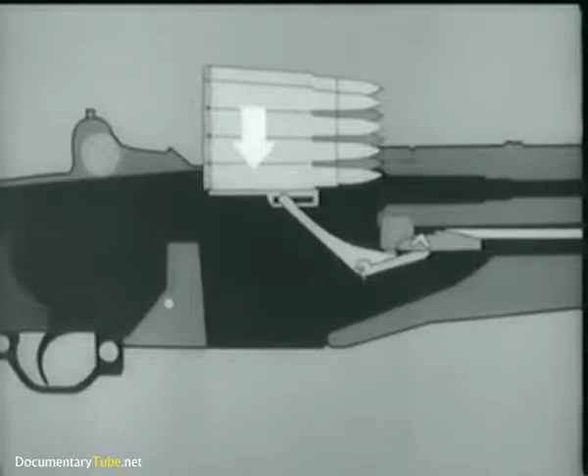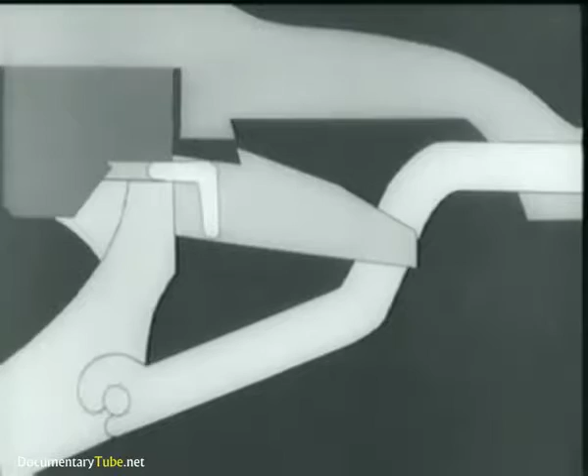This shows what happens when the clip is inserted. The bottom cartridge forces the follower down. The follower arm moves, and its heel rotates the accelerator, camming the operating rod catch down.

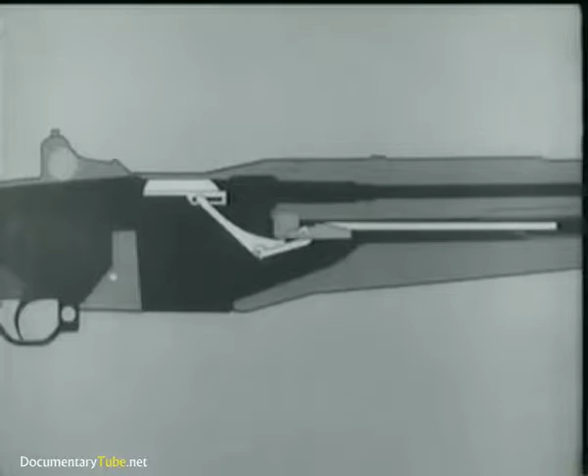We'll now add the operating rod, spring, and bolt to the diagram. Notice that the bolt is held to the rear by the operating rod, and the rod is held by its catch.

Now watch the accelerator as the follower moves down. It rotates, camming the operating rod catch down. When the catch disengages, the rod starts forward, pushed by its compressed spring, and carries the bolt with it.

Take a closer look at the bolt. As it moves forward, a cartridge is stripped from the clip and guided into the chamber by the feed ramp.

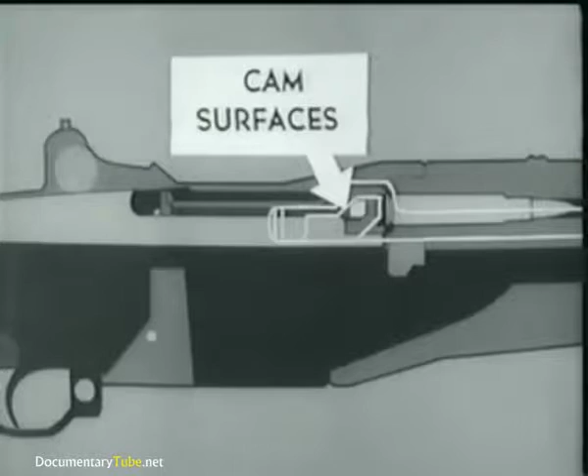When the cartridge is nearly seated, the bolt begins to lock. Watch how the cam surfaces in the operating rod handle act on the operating lug and rotate the bolt into the locked position once more.

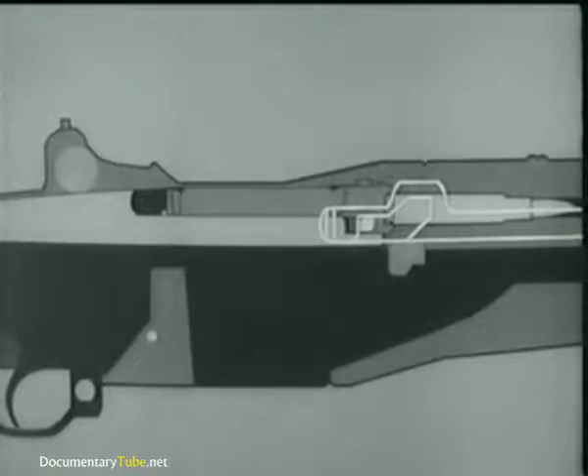Here's the same action on the rifle itself.

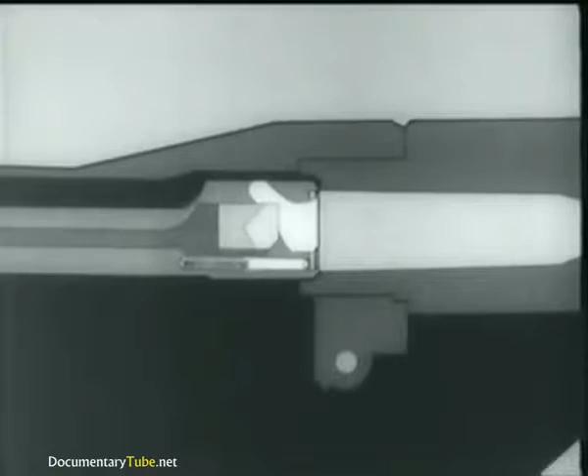Now, as the bolt locks, the extractor snaps into the extractor groove, and the ejector is forced into the face of the bolt, compressing the ejector spring. Remember that this happens as the bolt is locking.

Let's stop here a minute, remove the barrel and receiver from the stock, and take a look at what's happening at the rear of the bolt as it locks.

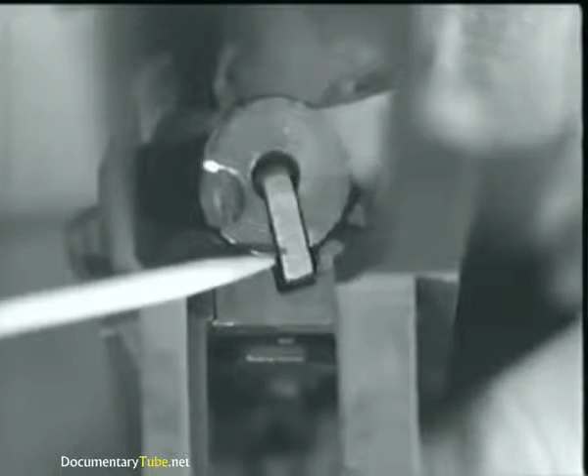Here we are. Now watch the firing pin tang line up with a cutout slot in the receiver bridge when the bolt rotates. Here's the complete action of locking.

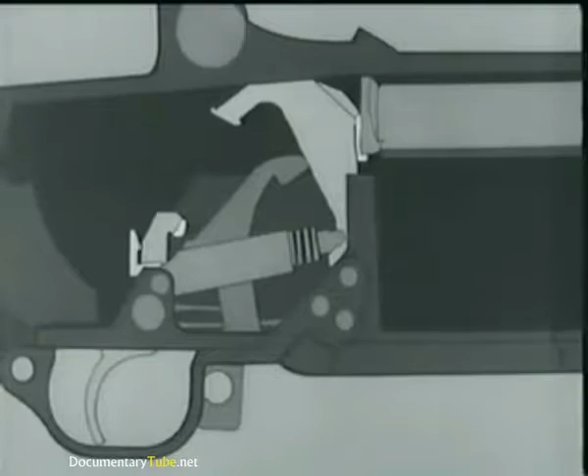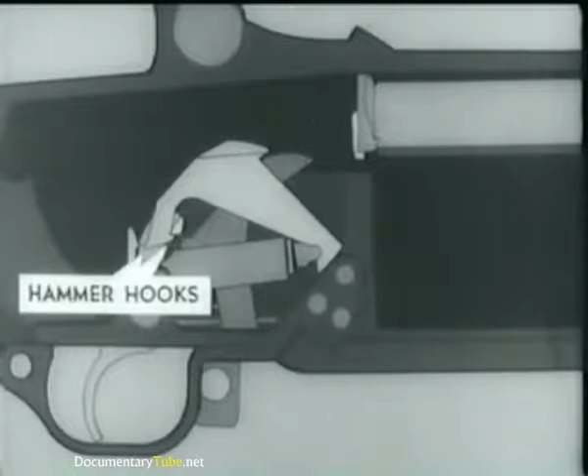Now that the bolt is locked, we're ready to fire. The hammer was cocked and placed in this position when we opened the breech to load the clips. When the trigger is pressed, the trigger lugs rotate and the hammer hooks are released. The hammer spring forces the hammer forward.

Before we fire, here's another point, a safety point in case the bolt is not locked. The bolt camming lug on the left side of the hammer engages in this cutaway portion on the bolt. If the bolt is not completely locked, either the lug will cam it into lock position or the hammer will not strike the firing pin tang.

So much for the safety feature. Now back to the hammer again. The lug engages the cutaway portion of the bolt, and the hammer strikes the firing pin tang, driving the firing pin through the face of the bolt and igniting the round.

The bullet travels along the barrel. Part of the exploding gases escape into the gas cylinder through the gas port, and this gas pressure drives the piston and operating rod back.

The operating rod moves back about 5/16 of an inch before it hits the operating lug. In other words, the projectile leaves the muzzle before unlocking begins.

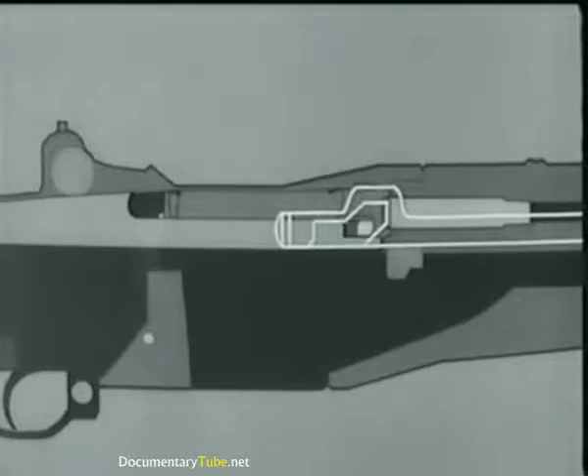Then the cam surface in the rod handle hits the operating lug. The bolt turns, unlocking the lugs from the receiver. Watch it again.

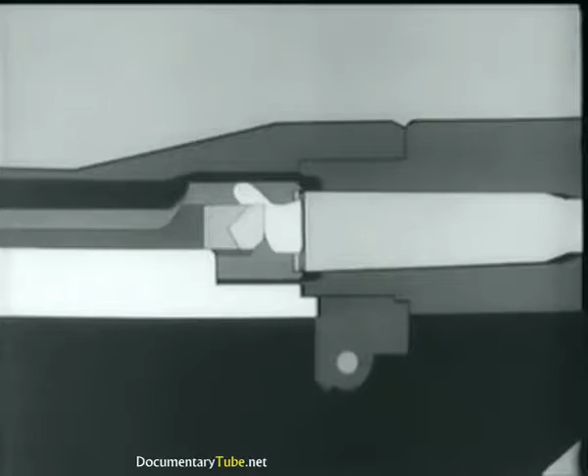The left locking lug cams against a small surface in the receiver, withdraws the bolt slightly, and breaks the cartridge case loose. This is called initial slow extraction.

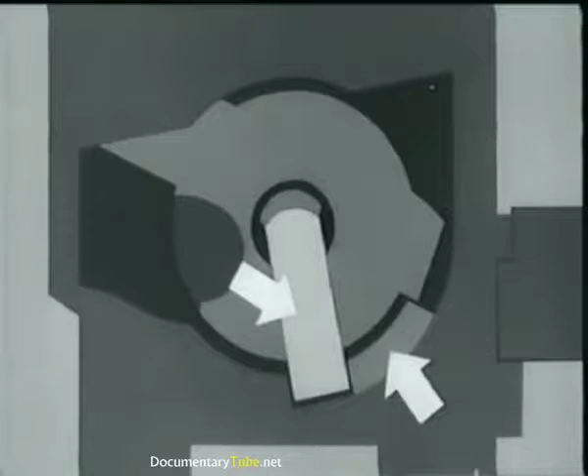At the same time, the bolt camming lug is cammed out of its notch and forces the hammer away from the firing pin tang. This allows the firing pin tang to cam against this surface on the receiver bridge, withdrawing the firing pin from the bolt face.

Here is the same action on the rifle. Now the complete action.

The bolt then is free to move on, and the operating rod continues back with the bolt, compressing the operating rod spring.

As the bolt moves back, the extractor withdraws the empty cartridge case. As the neck of the case clears the breech, the ejector jumps forward, pushed by its spring. The case pivots about the extractor and up and out of the receiver.

Here's the same thing in animation. Now, as the bolt moves to the rear, it forces the hammer back, which compresses the hammer spring. There the bolt is back, and the hammer is caught by the sear.

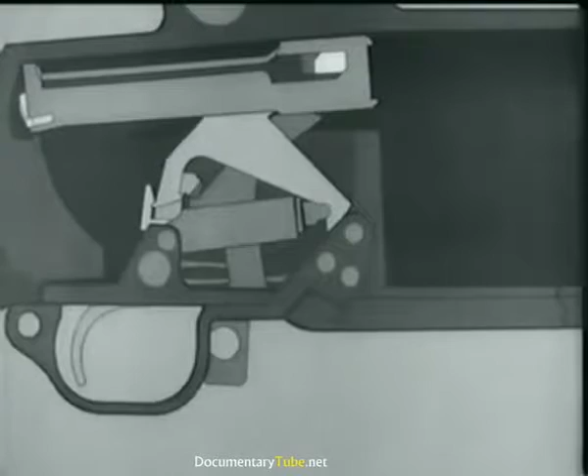But look at it again. Notice that the trigger is still all the way back, after the hammer is caught by the sear. The reason is that the hammer is back before the finger can release the trigger. Watch this action in slow motion.

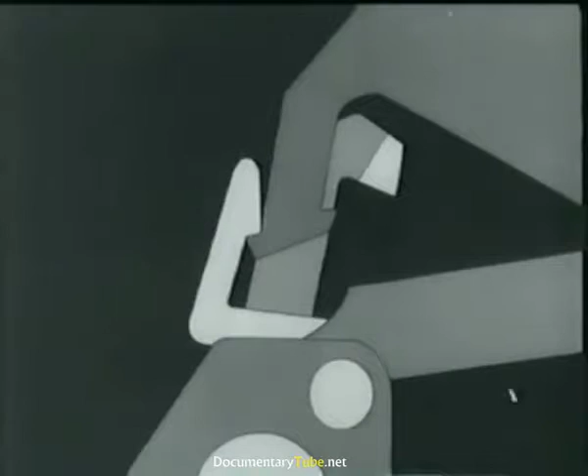Now we let the trigger forward. It frees the sear from the hammer, which starts forward, but it is caught by the trigger lug. Watch it once more.

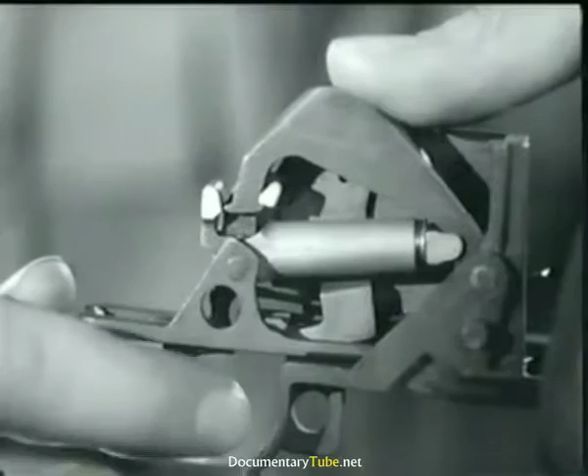Let's take a look at the same action on the rifle itself. Here's the trigger mechanism. Watch the hammer move up and catch on the trigger lug as the trigger is released. It's a very slight movement.

Now, as the bolt reached its rear position, the magazine was uncovered, allowing the empty case to be ejected.

We use the diagram and take the bolt to the rear again. Notice the follower move up, pushed by the follower arm, rod, and spring. It pushes the next cartridge up into feeding position. Now counter recoil starts. The operating rod spring expands.

The rod moves forward, pulling the bolt. The bolt strips a fresh cartridge from the magazine and seats it in the chamber. The bolt locks, and we're ready to fire again. The rifle will fire each time the trigger is pressed until the magazine is empty.

Then, when the bolt reaches the rear position, the follower is forced to the top of the clip, and the clip is ejected.

Here's how it's done. Notice the curved part of the follower rod. It cams the operating rod catch up, and the catch holds the operating rod back. Let's repeat it.

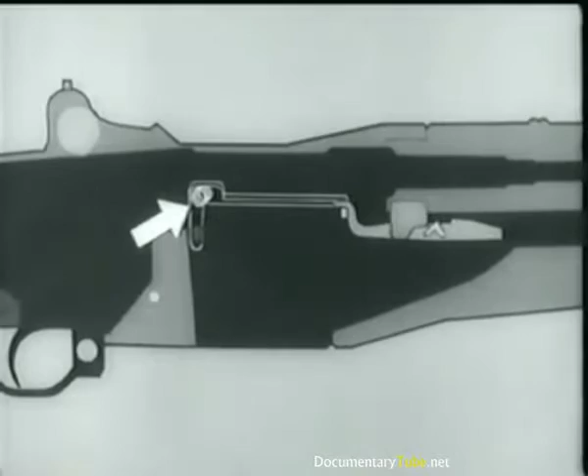At the same time, the rear arm of the rod catch pivots, forcing this stud of the clip latch down. The clip latch spring is compressed, and the latch disengages from the notch in the clip. The clip ejector forces the clip up and out of the receiver.

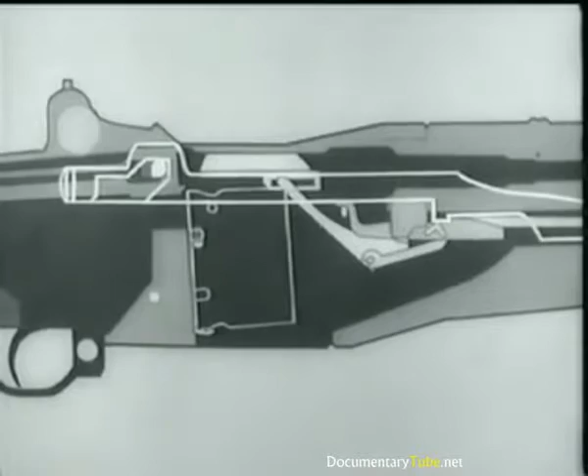Let's repeat this action again. The follower goes up. The operating rod catch is cammed up and catches the operating rod. The latch releases the clip, and it's kicked out of the receiver.

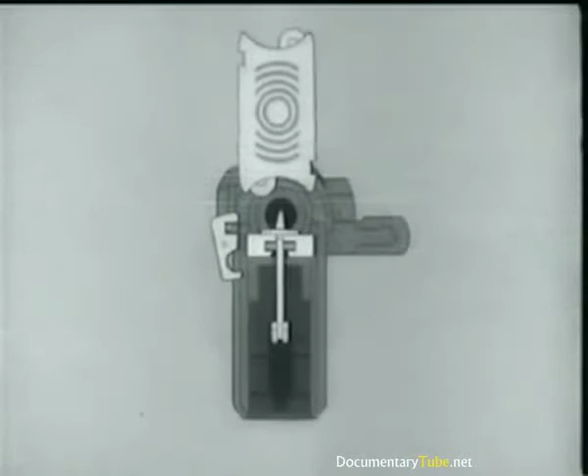When the fresh clip is loaded, the clip latch spring expands, and the latch again engages the clip. The operating rod once more is released, and the bolt goes forward, loading a new round.

Now for the safety. To set the rifle at safe when it is cocked, pull back the safety so that it is inside the trigger guard.

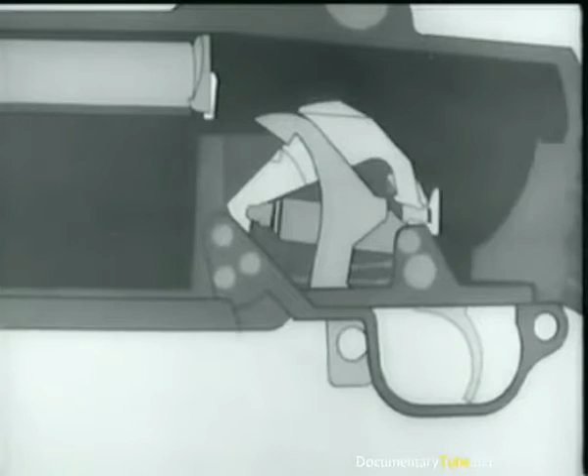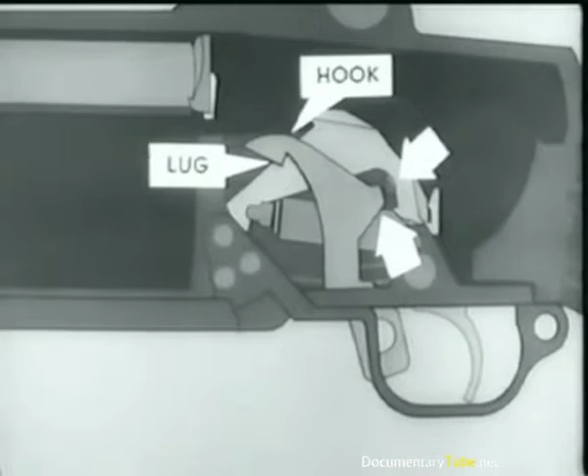Here's what happens. The safety rotates about the safety stud, and this hook engages the lug on the hammer. The trigger can't be pulled because the trigger lug is blocked by this hump on the safety.

One more point. In case of a misfire, the hammer can be cocked by pulling the trigger guard down. Watch the cocking action.

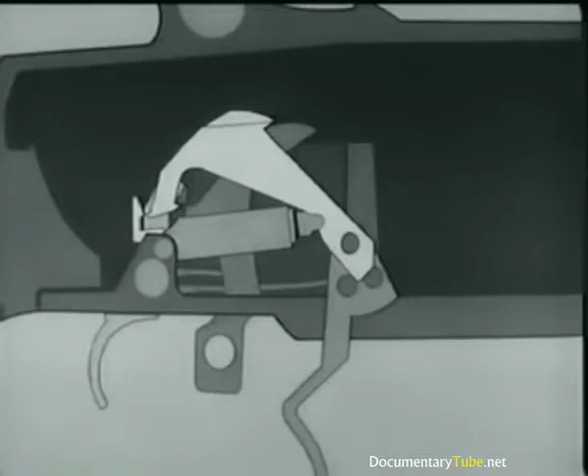Now let's go back and review a few points. A loaded clip is inserted.

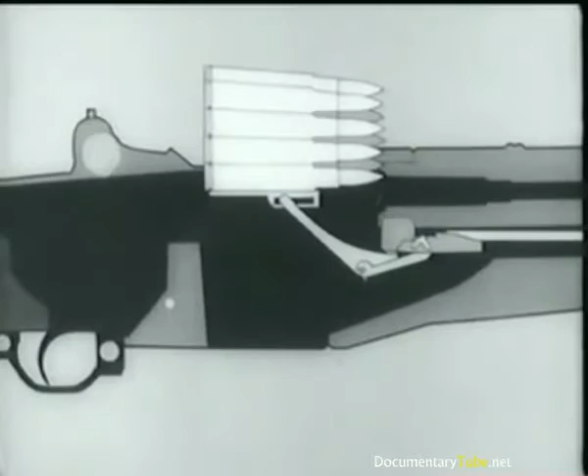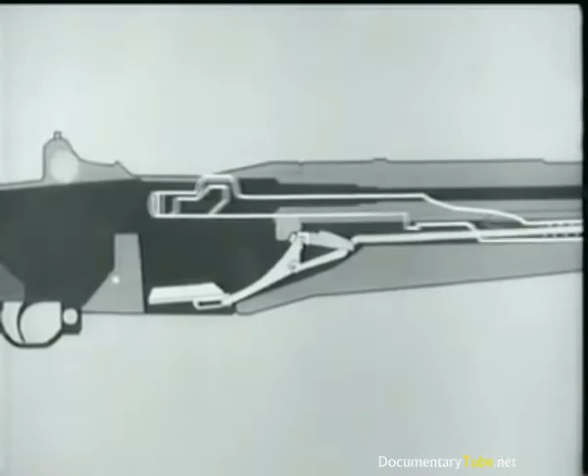The follower arm and accelerator rotate, camming the catch down and releasing the operating rod, which starts forward. The rod and bolt move forward. A cartridge is stripped and guided into the chamber.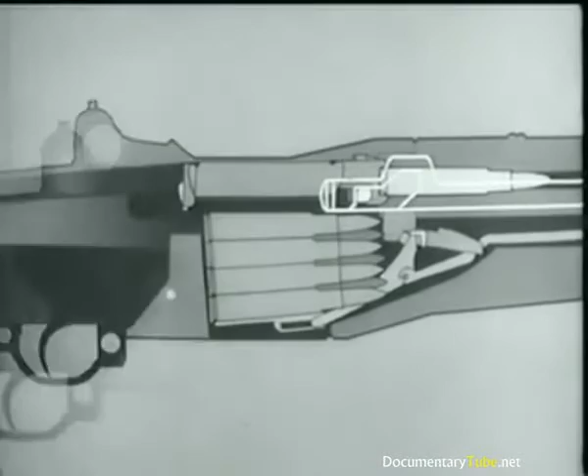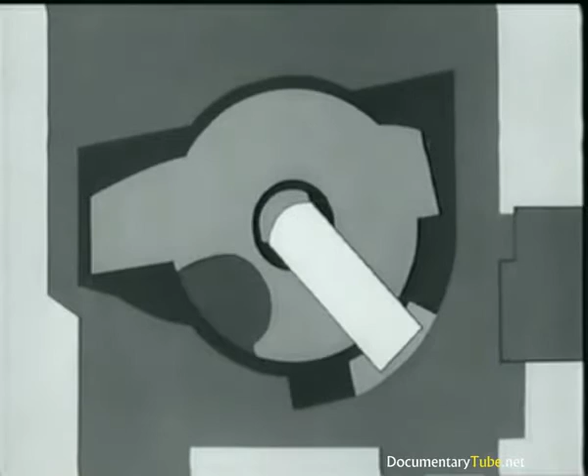Now the bolt begins to lock. At the same time, the extractor snaps into the extractor groove, and the ejector is forced back into the bolt. The firing pin tang lines up with a cutout slot, and we're ready to fire.

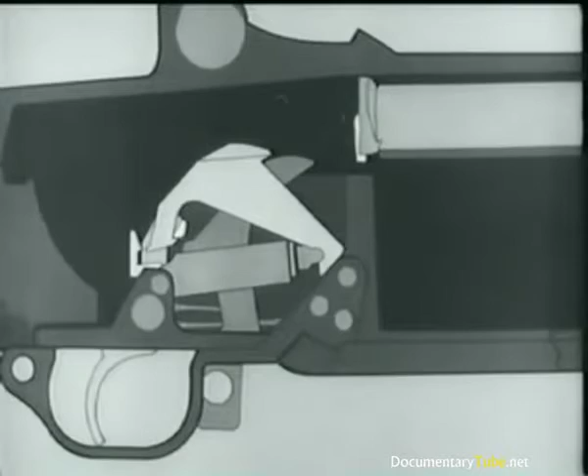The trigger is pulled. The trigger lug rotates, and the hammer goes forward. The firing pin is struck, and the cartridge fired. There goes the bullet.

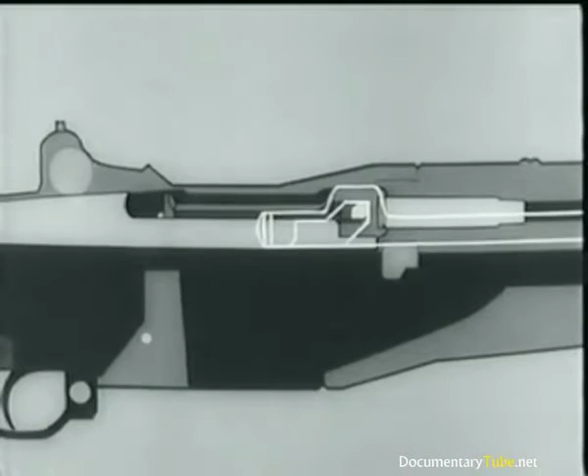Part of the gases escape into the gas cylinder and drive the piston and operating rod back. The bolt is hit, rotates, and starts to unlock. Slow initial extraction takes place.

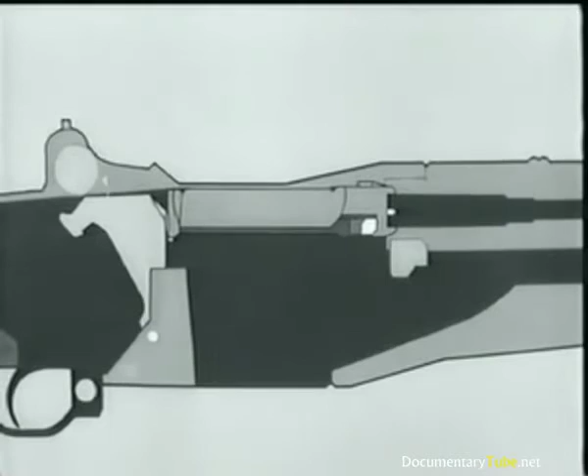The hammer is cammed back slightly. The firing pin is withdrawn from the bolt face. Unlocking is now completed.

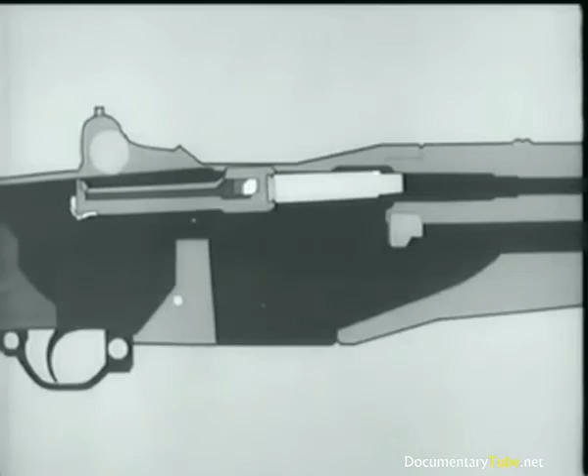The empty cartridge case is withdrawn and ejected. The bolt continues back and rides over the hammer. The hammer rotates back and is caught by the sear.

Now the trigger is released. The hammer slips from the sear and is caught by the trigger lug. Meanwhile, the follower moves up, pushing the next cartridge into position.

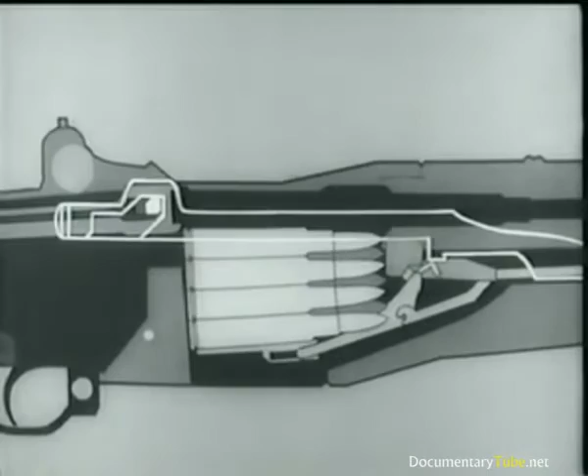The operating rod and bolt move forward. The cartridge is stripped from the magazine, seated, and the bolt is locked. When the bolt comes back after the clip is empty, the follower rises, and the clip is ejected. Notice that the bolt stays open.

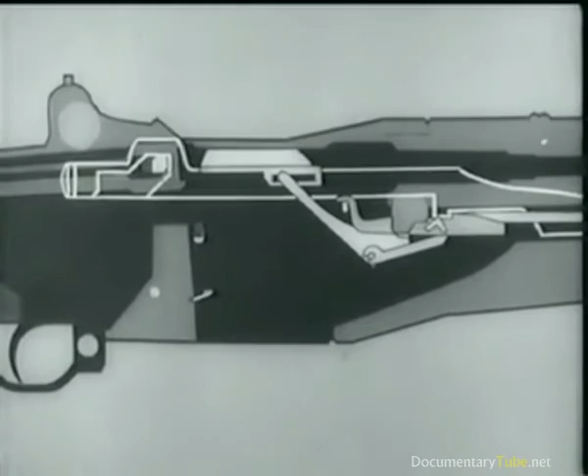Well, that's the inside story of the M1 rifle, and it took